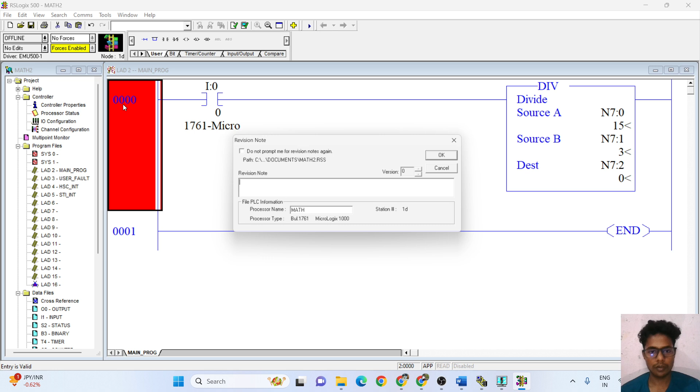In this video today I have covered division instruction in RSLogix 500 English software and what is the use of division instruction in RSLogix 500 English software. So engineers, stay with us till the last.

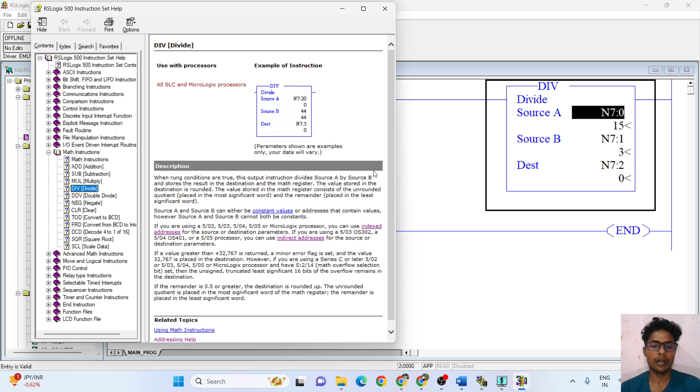Before the division instruction, I have to press F1. Here is what the division instruction is used for. When the rung condition is true, this output instruction divides the source A value by the source B value.

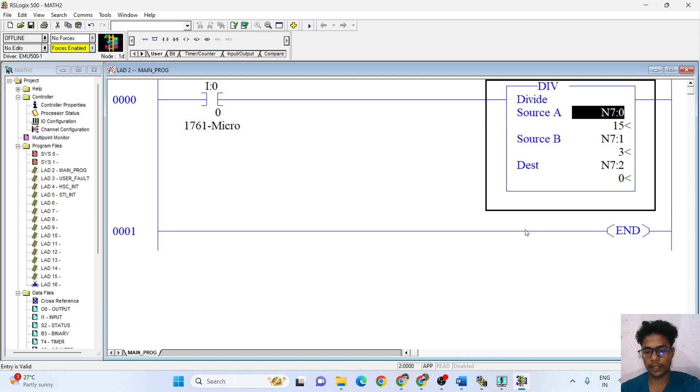You have to read it, and now I have to pause it. Then you have to pause this. Then you have to read it. Now I have to cut it and go to this. Divide instruction is used to divide the value in integer 1 by the value of integer 2.

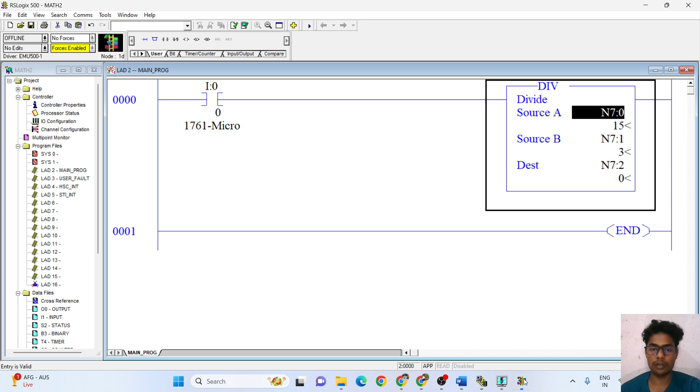And so engineers, let's come to RSLogix 500 English software where I will cover what is the use of divide instruction in RSLogix 500 English software and how you use it. So let's come to RSLogix 500 English software, and then I have to download this program. Then you have to go to run mode.

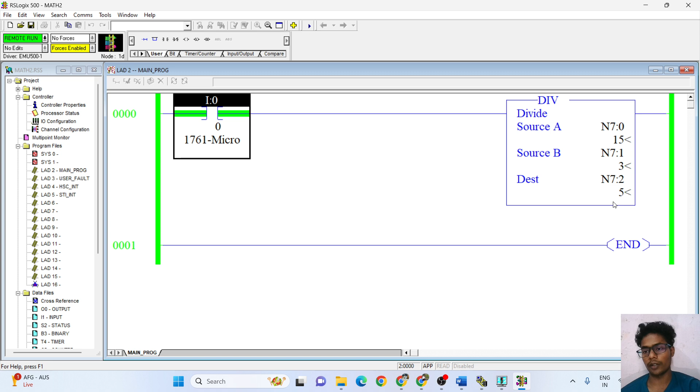Now I take source A value 15 and source B value 3, and then I press the toggle bit, then the result will be shown. So in real life you can see RSLogix 500 English software and what is the use of it. So engineers, I hope you understand. Here I change the value to 28. So 28 divided by 4 equals 7.

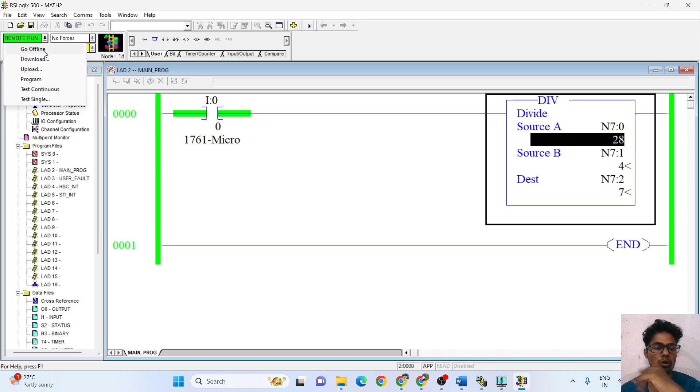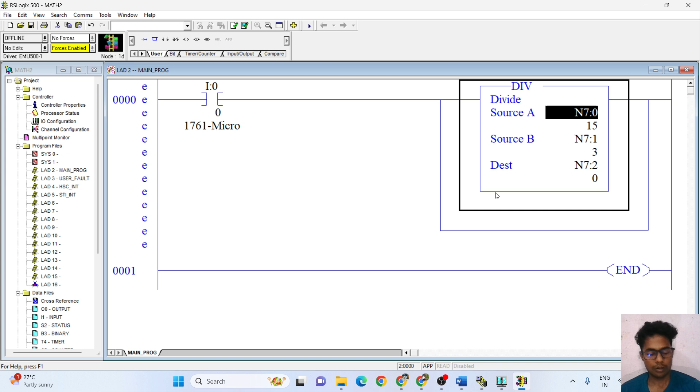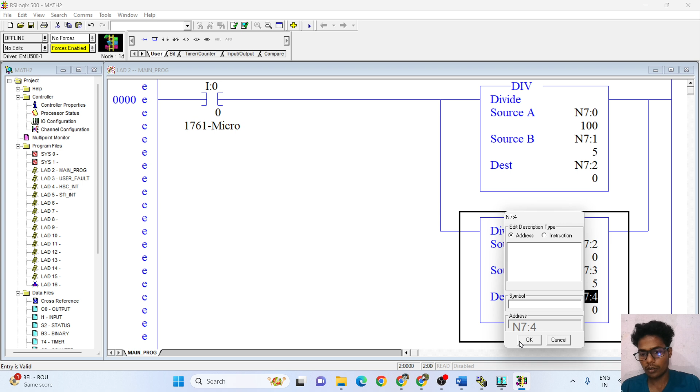Where you have to use it and how you use it. Now I have to take one more branch. Then I have to go here. I take one more branch and put this into it. Oh, it will be wrong. Then I have to keep it. Control C, Control V. I have to put this value into it. In here I take 100 value and divide by 5. Then here I have divided by 5. And here I have to change the 3. Okay. This will be 4.

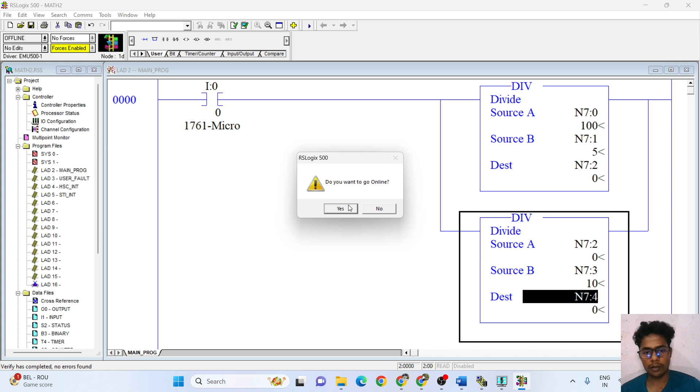Then I have to download this program. Then you have to go to run mode. Yes. Now I press the toggle bit. 100 divided by 5. Yeah, 20. Then 20 divided by 10. Actually here we had taken the value 10. So 20 divided by 10, then our answer will be shown. So engineers, you understand what is the use of division instruction?